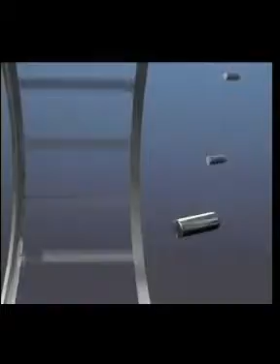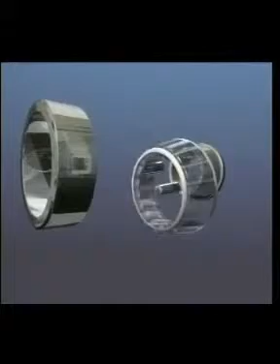A taper roller bearing consists of two separate parts: an inner ring complete with a set of tapered rollers secured by a pressed steel cage called the cone assembly, and an outer ring called the cup. The cup and cone are mounted separately, the cup in the housing and the cone on the shaft. Only when they're assembled together do they form a complete bearing.

Because taper roller bearings can only carry loads in one direction, they must be used in pairs, opposed to one another and adjusted together, then secured by a lock nut.

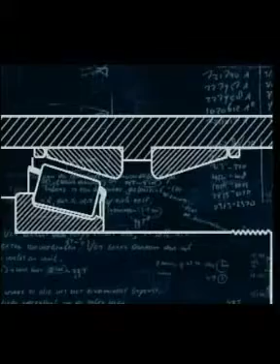Taper roller bearings are suitable for carrying combined radial and axial loads. Depending on the application, they can be assembled in back-to-back or face-to-face configurations. When mounting these bearings, they must always be assembled opposed to each other. They're particularly robust and are used where heavy loads and moderate speeds apply.

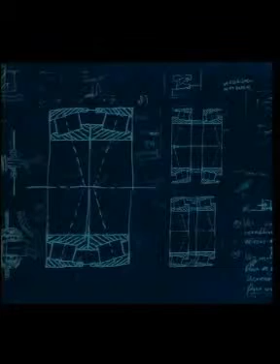This film shows the mounting and dismounting of an industrial taper roller application, similar to that of a truck wheel. In this application, the cups are an interference fit in the housing and a clearance fit for the cone assemblies on the shaft, as this is a rotating outer ring application. This makes it easier to adjust the bearings. Taper roller bearings are commonly used in applications like industrial gearboxes, highway equipment and truck wheels.

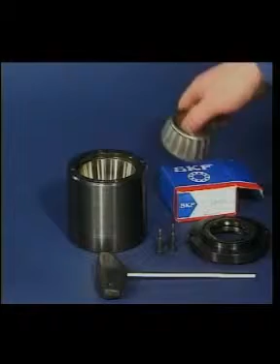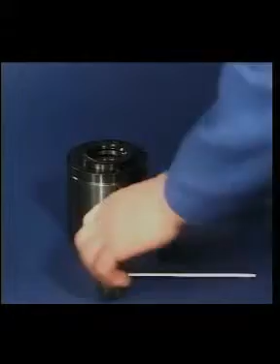For the mounting of taper roller bearings, first fit both the cups into the housing using the SKF fitting toolkit. One of the cone assemblies is then placed in its matching cup already in the housing, and the end cap is secured. If the bearings are grease lubricated, it should be done at this stage.

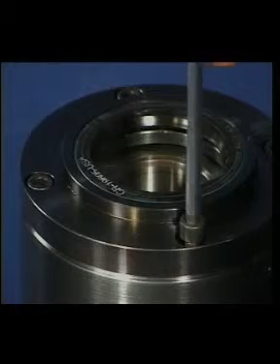The bearing should be kept in its protective package until the actual mounting takes place. The housing assembly is placed on the shaft, and whilst partially supported, fit the second cone assembly.

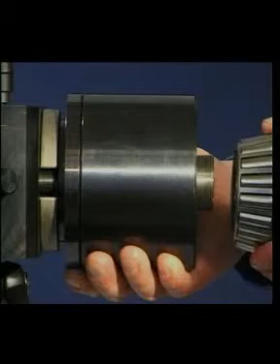Fit the retaining washers and hand tighten the lock nut. When adjusting taper roller bearings, it's important to rotate the bearings while hand tightening the nut. This will effectively seat the rollers onto the cone rib, ensuring correct adjustment is achieved.

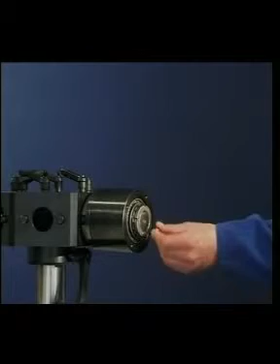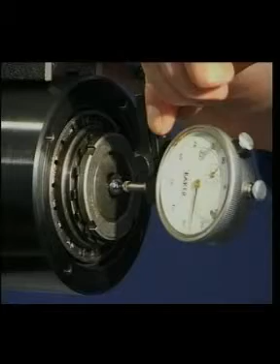This application is to be adjusted with a small amount of axial clearance. The most common way of measuring the axial clearance is with a dial indicator. It's necessary to rotate, then push and pull the assembly to determine the clearance value.

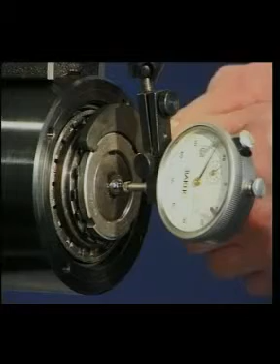The lock nut is adjusted to achieve the required axial clearance. Depending on the application, preload or clearance values may be required. Refer to the machine manual for the specific adjustment value.

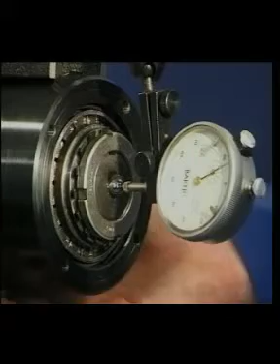Secure the lock nut with the lock washer tab. A final clearance check is required before greasing and fitting the remaining end cap. Remember, the degree of clearance is set on assembly and not at the manufacturing stage of the bearing.

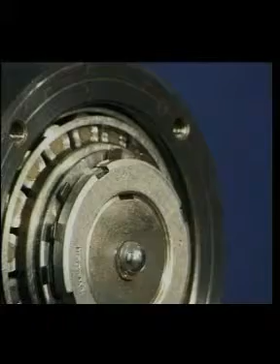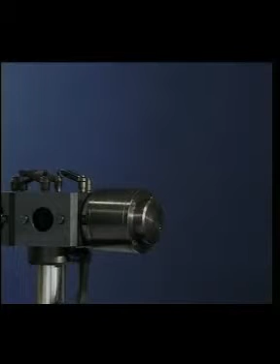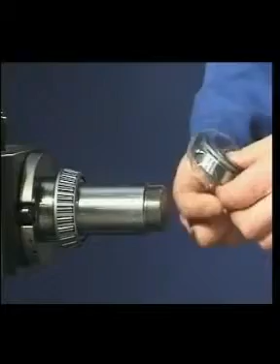Another type of taper roller setup is when a pair of complete bearings are carefully measured and appropriate spacers made to give the required clearance or preload between them. This is usually done at the manufacturing stage. It's essential that the spacers and bearings are kept together as a unit.

Unlike the individual taper roller bearing, the cup and cone assemblies are matched sets and must not be mixed. In this application, the inner rings and spacer are clamped tight against the shoulder on the shaft. When mounting taper roller bearings, make sure they're always assembled opposed to each other. The wrong configuration can cause severe damage to the equipment.

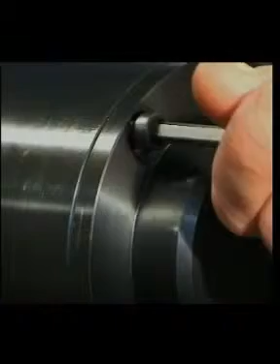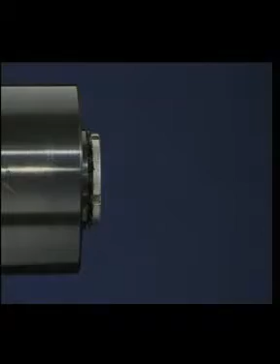To dismount taper roller bearings, use the fitting procedure in reverse. After removing the end cap, drive back the lock washer tab and unscrew the lock nut. The taper roller assembly can now easily be removed from the shaft.

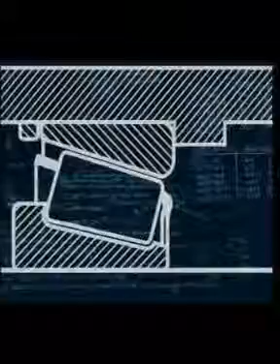Taper roller bearings can be adjusted with either axial clearance or preload. When tightening the lock nut, the axial clearance in the application is reduced. Continued tightening of the lock nut at this stage will preload the application.

To achieve the correct torque measurement, refer to the machine manual. Heavy preload will reduce bearing life, and too much clearance will cause excessive shaft movement and damage to the application.